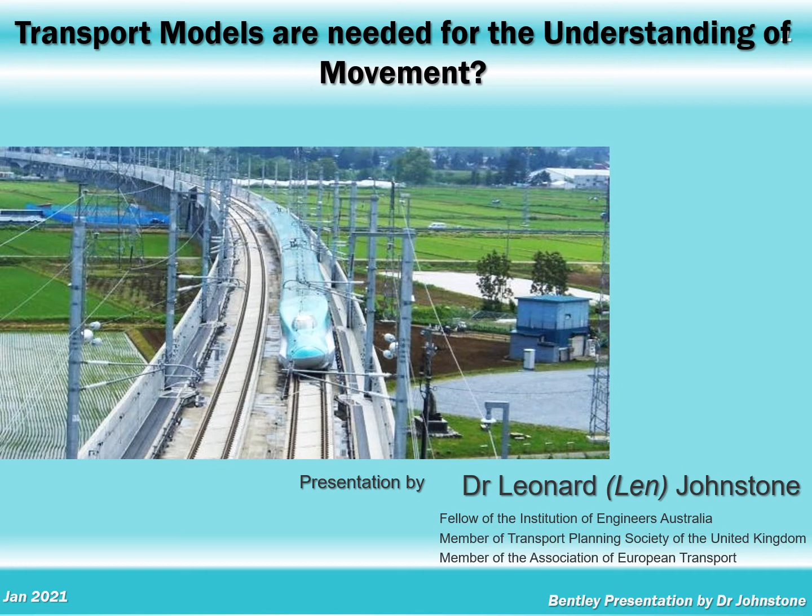Good afternoon. Today's presentation is about the understanding of the movement of people and also the need for the understanding of this in conjunction with the development of a transport model when you're looking at a particular scenario.

Transit development, or the movement of people by any form of public transport, allows a greater mobility for more people and offers decision makers the opportunity to restrict the use of private vehicles. But we think about urban transport, but what of regional or intercity travel? Should we not encourage the same principles in this type of movement?

Today's presentation is divided into 6 sections: an understanding of the movement of people, a modeling overview, a look at the methodology and the forecasting procedure, followed by some examples, and then a recap of what we've done and learned hopefully today. Now, let's look at some things in perspective in the movement of people.

Indian cities in perspective. We will use a transport model for the sizing of the system to look at technology. Today we have to, as transport planners and decision makers, consider compliance with green technology. And can we use a transport model to correctly understand the movement of people between various locations? Let's look at Indian cities in perspective.

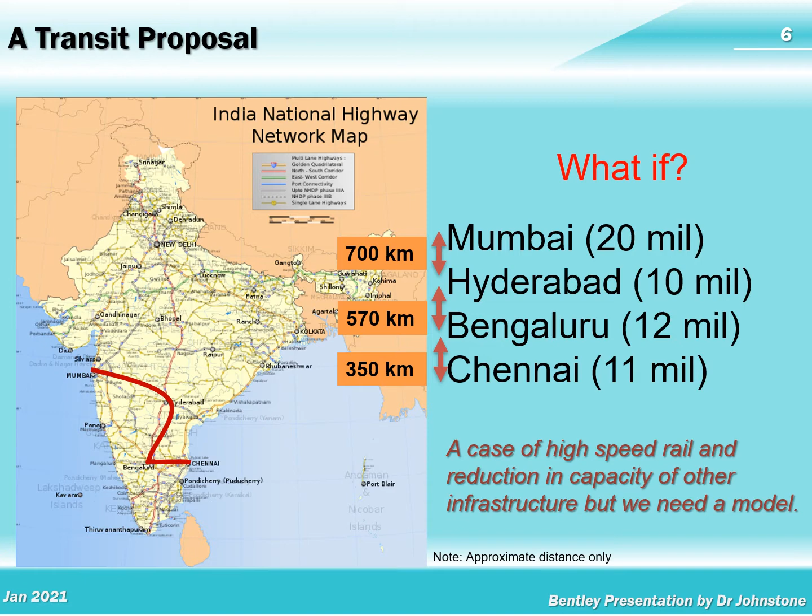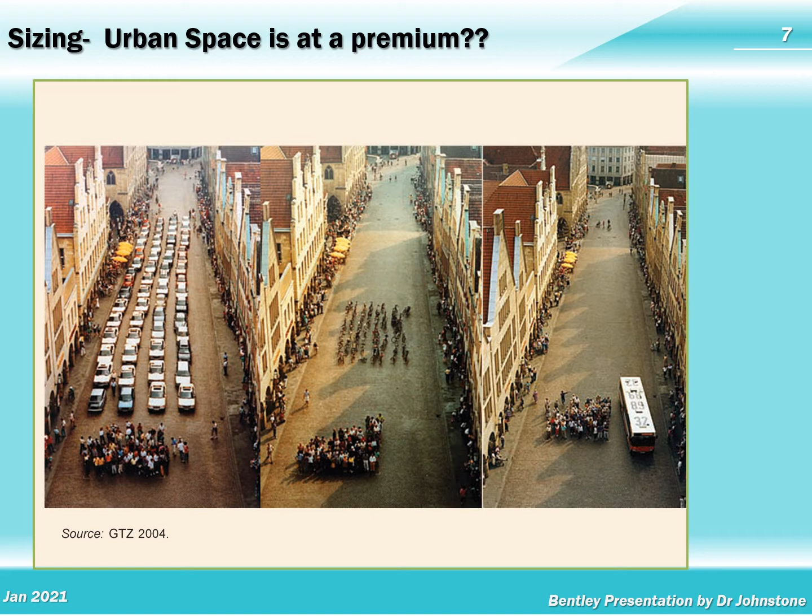We want to size our development. If we have a transit system, we want to size it. Urban space, as you can see, is a premium. If you look on the left-hand side, you see the cars needed to take this number of people, or the number of motorcycles in the center needed to take this number of people. Or finally, we see a bus. One bus can take the same number of people. So we want to look at the system sizing. And this is what can be helped with a public transport model.

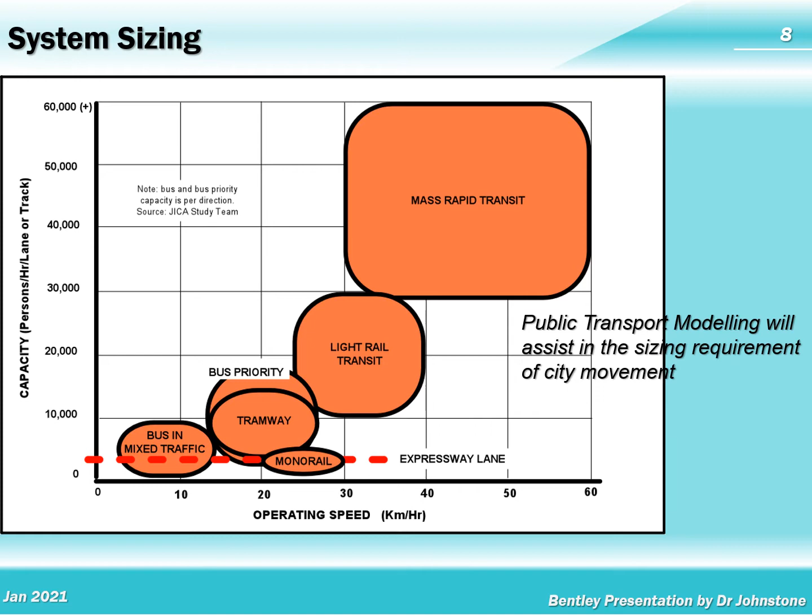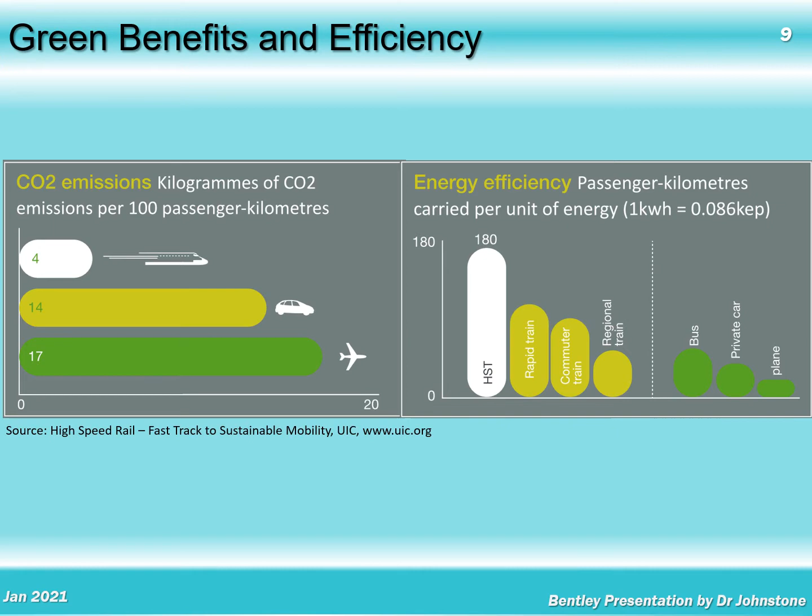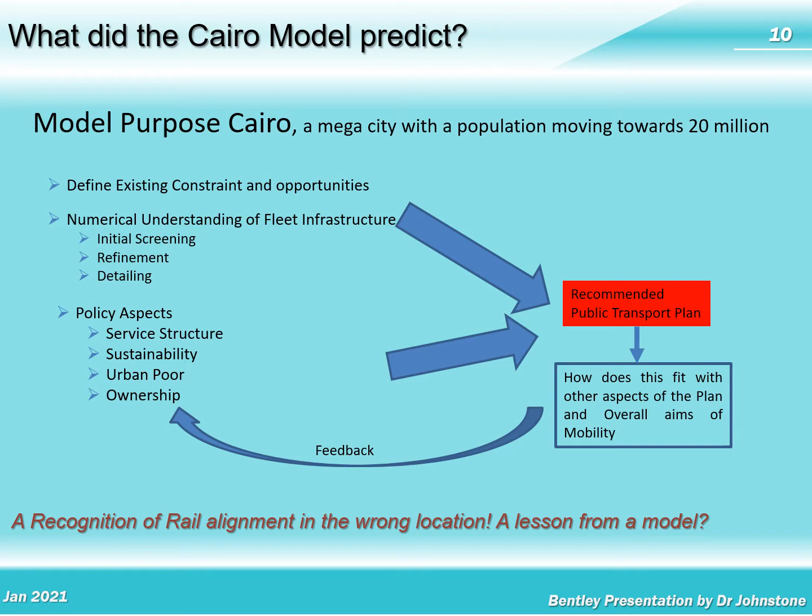In Cairo, a mega city of the world with a population moving towards 20 million people, there is a transport model, and it was used for initial screening. But before there was a transit model or transport model for Cairo, we'd already drawn lines on a map which said this is where the transit line should go. But when we used our transport model and GIS techniques, we saw that this line was in the wrong place. So with mathematical techniques developed within the transport model, we could see that it was appropriate to change the alignment.

So let's step back. Let's look at a modeling overview. Let's try to understand people movement, predictability, transit in a city. We'll have a brief look at Chennai, transit in a region. Where has high-speed rail been developed already? Transit in a city, transit, land development are interlinked. Transit means land cost improvement.

In Bangkok, for example, as the existing elevated transit system was extended, before it was even open, adjacent to every station, once people knew where the station was, there were shopping centers or high-rise accommodation. In other words, the land development in that area was helped. So it pushes up the value of the real estate if you have transit in a city. And we can use a transport model to help us understand that.

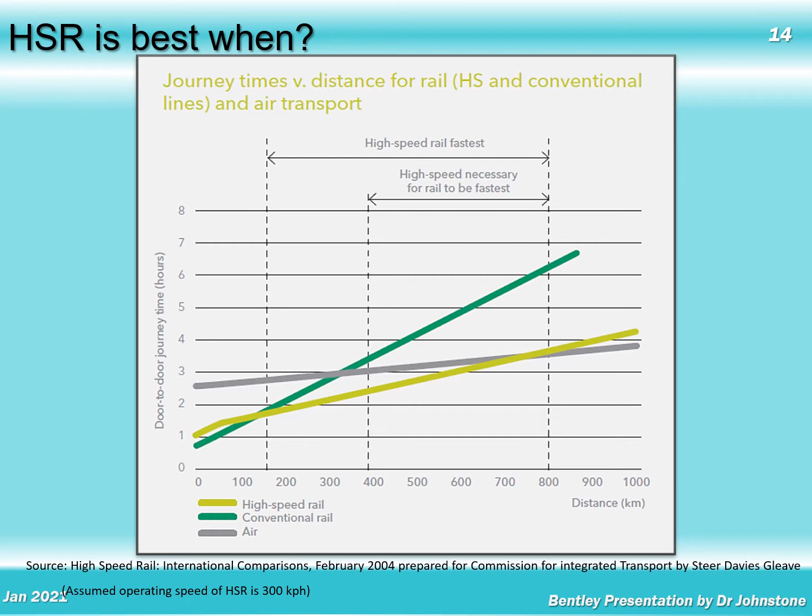And of course, when we think of high-speed rail against air, we can go to the center of a city and get on a train if the station is in the center of the city. But with a plane, we have to go to an airport, which is on the outskirts of a city normally, and then we have to wait maybe 1 or 2 hours for the plane. But with high-speed rail, we can do this almost immediately.

Let's look at the potential impact of a high-speed rail. If we look at some of the original lines in the European situation, for example, Paris to Lyon or Madrid to Seville, about 500 kilometers separation in both cases. Air transport before high-speed rail was 30 to 40%, falling to 7 to 13%. Road was 29 to 44%, falling to 20 to 36%.

If we build high-speed rail, do we still need to put lots of infrastructure in, especially to airports? We see here in this example, especially Paris to Lyon, one of the first routes in Europe, the air travel went from 31% to 7%, a very significant difference.

Where has high-speed rail been developed? We see it in Asia, we see it in Europe. In Asia, it's mainly been Japan, China, and Taiwan to date. And we see the network in Japan, for example, 2,400 kilometers. China, almost 10,000 kilometers. Taiwan, a small island, 350 kilometers. The average operational speed is 300 kilometers per hour.

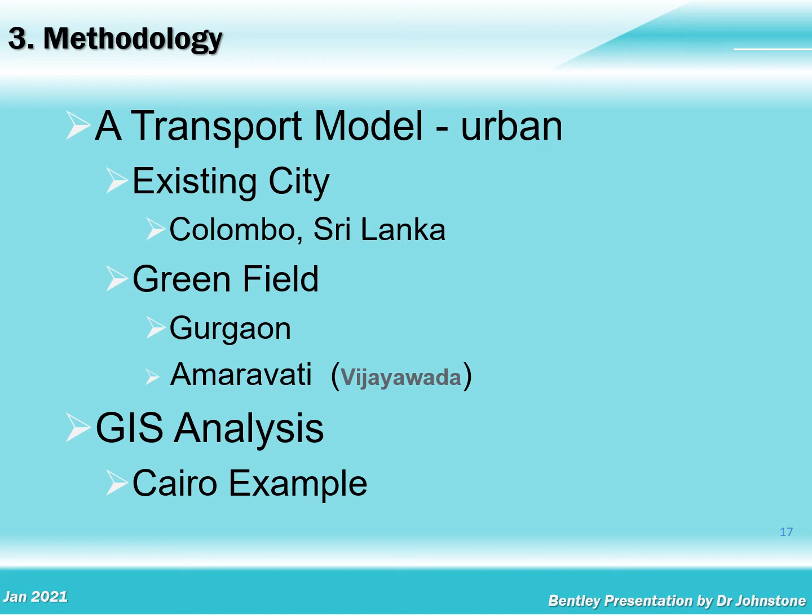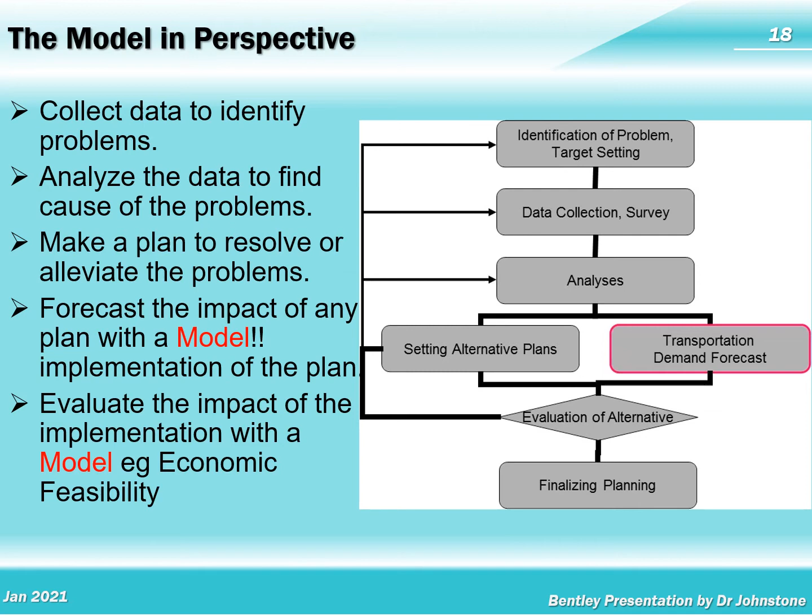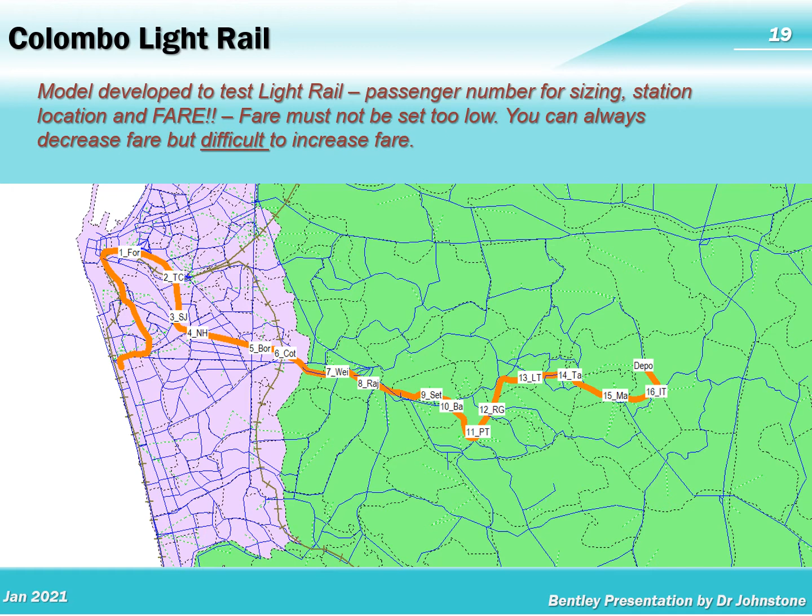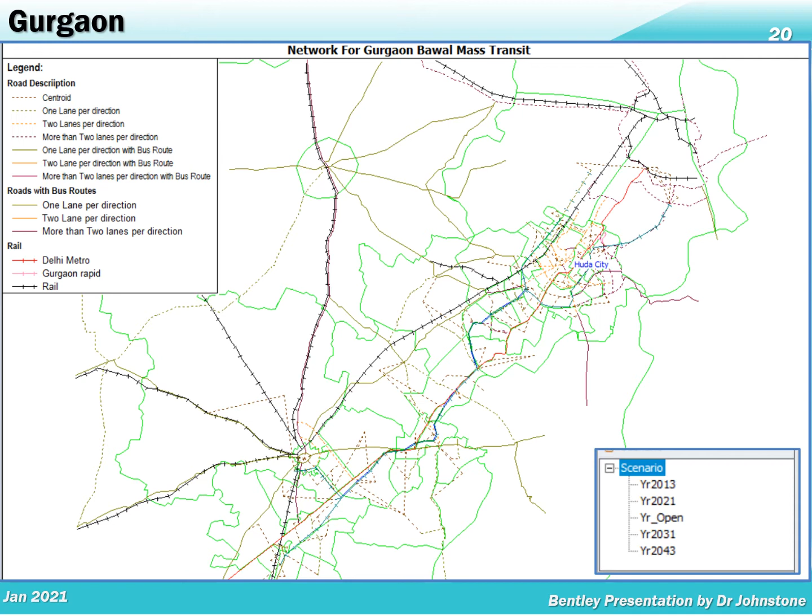Many of you are aware of the wonderful metro system as it exists in Delhi. There was a project to develop a greenfield site south, an extension of the Delhi metro from Huda City to Bawal. This unfortunately did not materialize at this point in time, but the model gave us an idea of how and how many people would be attracted to such a system if it was developed and made to operate.

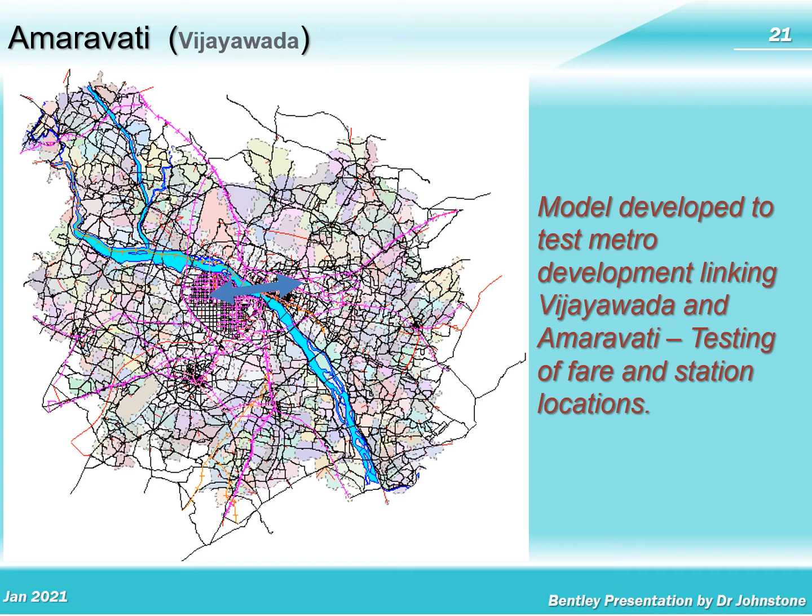In Amaravati, which was a proposed new city adjacent to Vijayawada, the model was used to develop and test a metro. We wanted to connect the existing city of Vijayawada to the proposed new city of Amaravati. We needed to test what type of system we might need. This was very important to understand, again, the sizing of the system. We wanted to use the model that we developed here to also estimate the fare and look at the station locations.

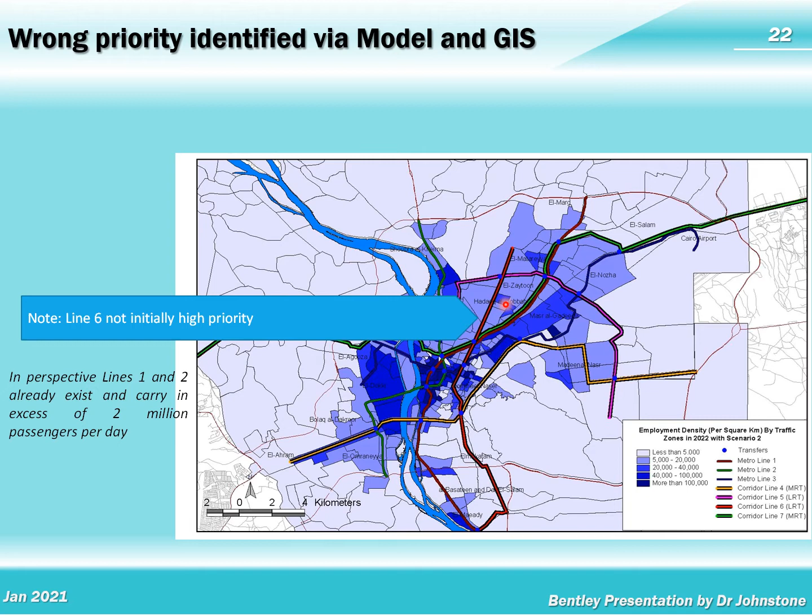And by using a transport model that was developed for Cairo, together with GIS techniques, we saw that it was important that the metro line go next in this direction, adjacent to higher populations and employment centers, rather than in this direction, where the population and employment was not so high. The importance is we always only have limited funds for expenditure. Thus, the model, when developed, can help us and guide us in the right direction.

Now we want to look at forecasting procedure, the model structure, what is needed. We often have to collect data. Many places do not have a transport model, so we need to collect data to develop such a model. Just a couple of techniques and definitions that we might need as we look at the development. This is really with respect to an urban transport model.

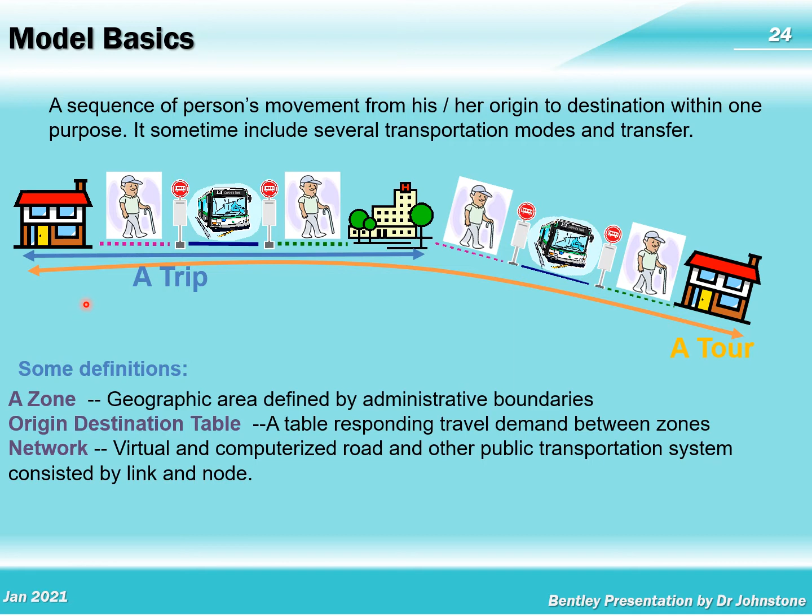The network that we might talk about is virtual and is the computerized road and public transportation system. You might say it is a digital twin of the reality. We look at the reality of a network, which is the road system, the transit system, and how we might travel by transit, or how we might travel by air, which is part of the network for long distance traffic. And then we put this into a digital system, which is a virtual computer road and other public transport system, so that we can understand it.

What do we need in the development of a transport model? If we have a city model, if we have sufficient funds, we would do a home interview survey. These are very expensive. A home interview survey in any major city, there will not be very much change out of $1 million US converted into local currency. We want to do traffic counts. We want to do travel speed surveys. We want to do inventory surveys. And we also need to collect demographic data at a small area or traffic zone basis. So often the demographic data is available from census information.

Now this is a city model. We look at a regional model and we want to do traffic count surveys. We want to do roadside interview surveys. We may want to do sensitivity surveys. If we're looking at not only people, but cargo as well, then we need to do freight surveys. But for this presentation, we're concentrating on the movement of people at the city area and the regional or national area.

So one particular survey that we can look at, which is used both in a city analysis and in a national or regional analysis, is the roadside interview survey, becoming more difficult in cities because we need the cooperation of law enforcement to actually stop vehicles. But with the vehicle stopping, we want to know the origin and destination of a trip, and we want to know that by a traffic zone. So we have to work out a way, when people tell you where they're going from and going to, to then be able to put that into a digital format.

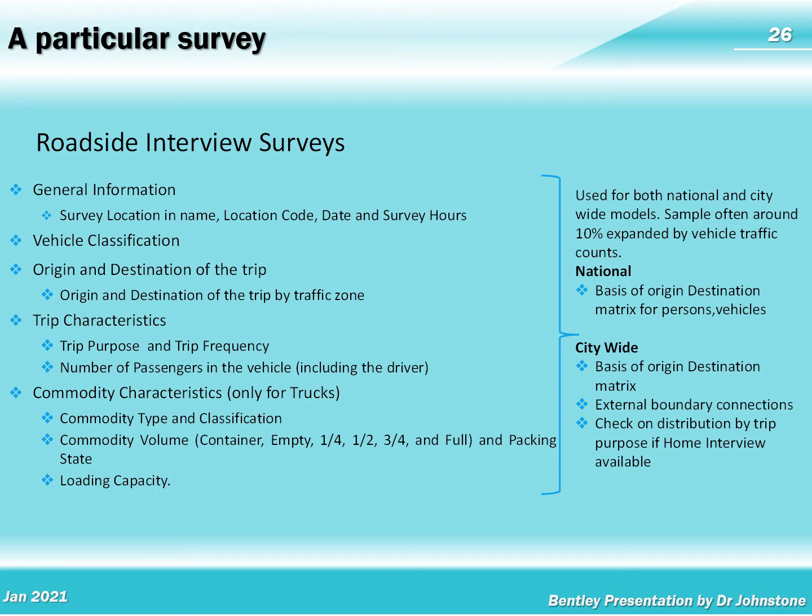In this case, this is an example of a high-speed survey that was done looking at the potential travel between Yangon, the capital of Myanmar, and, you might say, the cultural or tourist center, Mandalay. Myanmar is quite unique in that it has these two major cities, which could be at either end of a railway link. But in the center, to make it even more attractive, we have Naypyidaw, the national administration's capital.

Here, we wanted to understand in the surveys initially how many people would use the system. So we needed to understand the sensitivity of fare. Fare became very important. So we needed to know if people were prepared to move away from the use of, in Myanmar, for most people it's bus, but there's some people who use car. The existing train service or rail service is very slow, so people did not tend to use that between the two cities.

We have different model structures, you might say. For a regional or national model you see on the left-hand side, where we look at total person trips, and we might split into high performance and non-high performance. High performance being air and high-speed rail. So these are the faster trips. Non-high performance being car, and then splitting into public transport. We would often look at this by economic clusters. So we would do the modal split for each economic cluster. In the case of this, which is an example of a high-speed rail model from southern India, we did it in

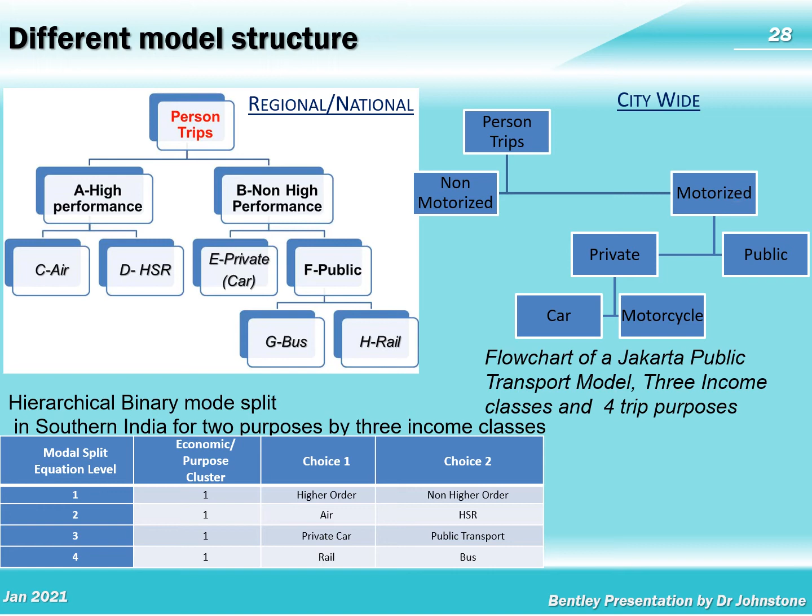When we talk about modal split, it's worthwhile just spending a few minutes to understand that if we can do 2 choices, and so it's a hierarchical model as we just saw, then we can use a logit model. And you might say the calibration of a logit model is very difficult, but if the probability and the cost can be structured correctly, then if we do a series of binary choices, we can actually do a best fit linear regression, which of course linear regression is relatively easy.

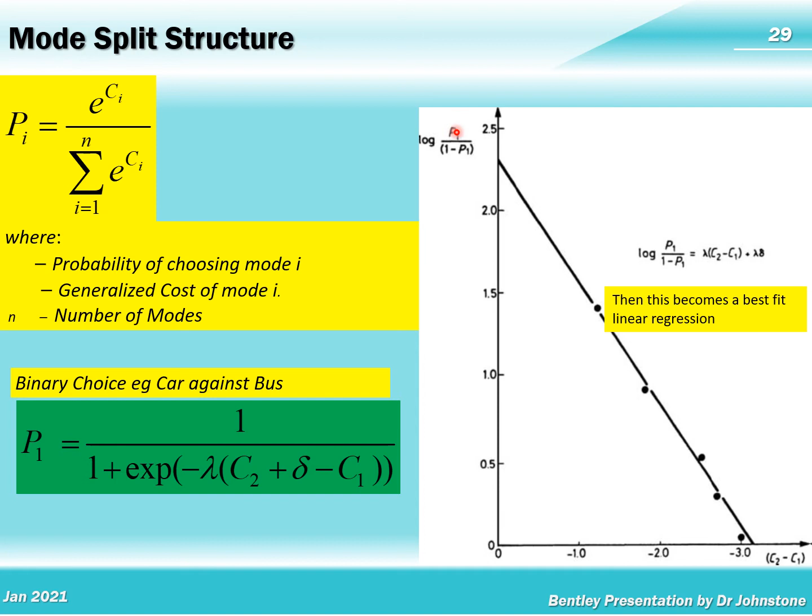The techniques are well known, and it can even be done in a spreadsheet to estimate the parameters of this line. So even though the mathematics might look complex and complicated, we can break it down into some form such as this. Some examples. I want to share with you 2 examples. One, when we developed a transport model for the outskirts of Delhi, and another example when we developed a high-speed rail model in southern India.

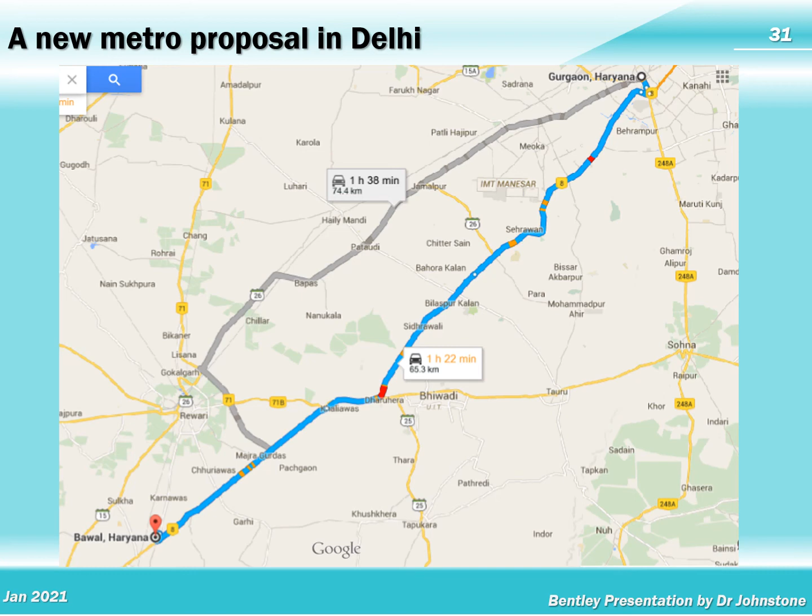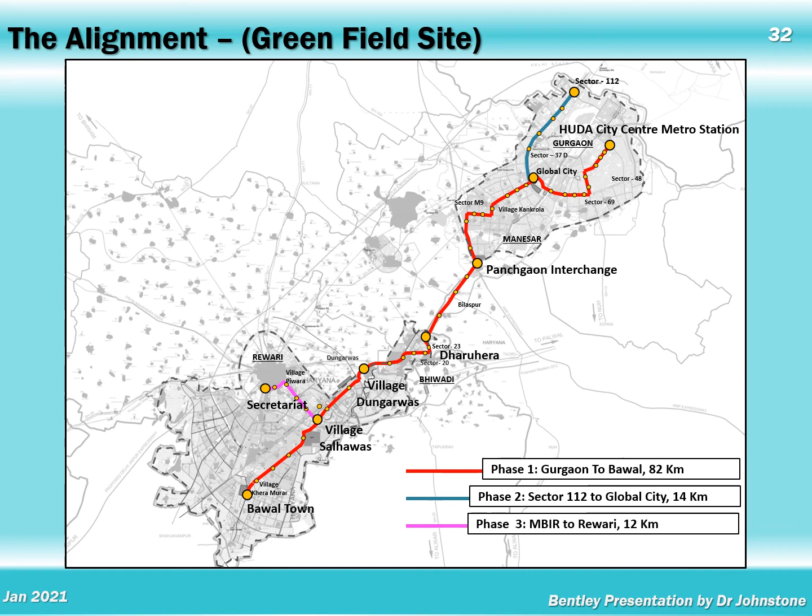So this is Huda city, and this is Bawal. And so we were looking at developing a transit system here. But this was almost a greenfield at the time. This is about five years ago, if I remember correctly. And so it was difficult to understand what might happen when you actually had no people there at that particular point in time. So with a greenfield site, we looked at having to do surveys to understand the movement of people, and then we had to also look at where we might have the major centers for our station locations.

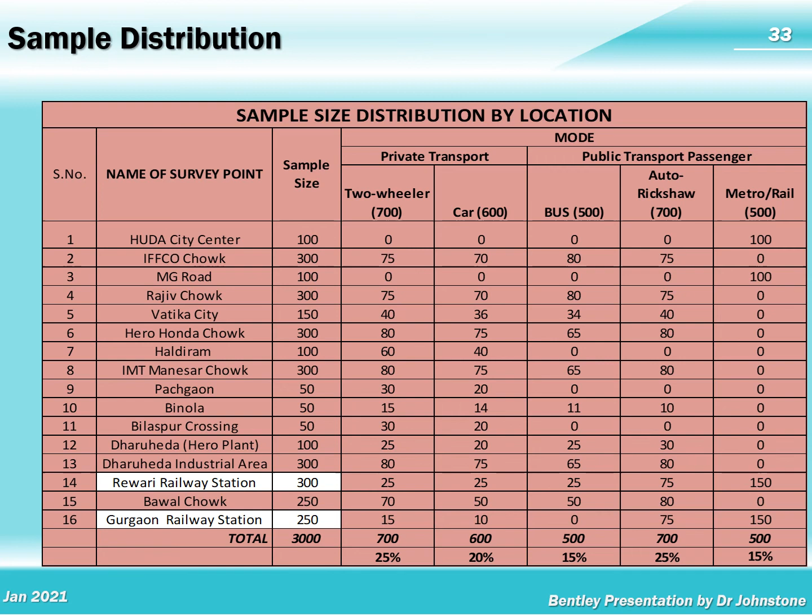So we did a small survey at many points along the potential route, where we interviewed 2-wheeler vehicles, 700 of them, cars, 600 of them, buses, 500, auto rickshaws, and any existing rail transit. So in the survey form, we asked people personal data, their education level, occupation, monthly income, number of household vehicles. That might seem a strange question, but household vehicles also give us an idea of the income of the household. People often don't want to discuss their income, but they're quite proud to tell you how many vehicles are in their household.

The next part was the trip data, how people are traveling at the moment. And then the third part of the survey was whether they were prepared to pay additional amounts of money for better comfort, and whether they were prepared to pay for time saving as well. And this became the structure of the transport model that we used to understand this process. Our projections from this transport model suggested that we would get a reasonable amount of transit here after opening.

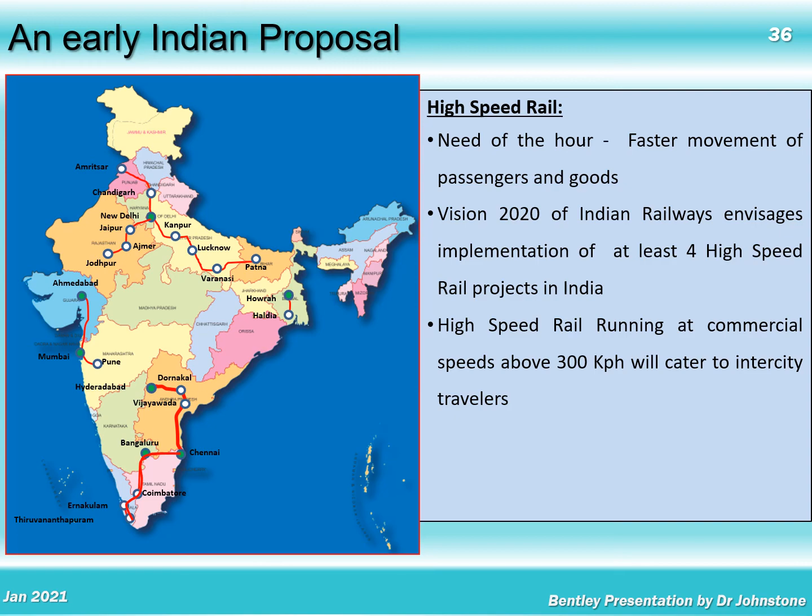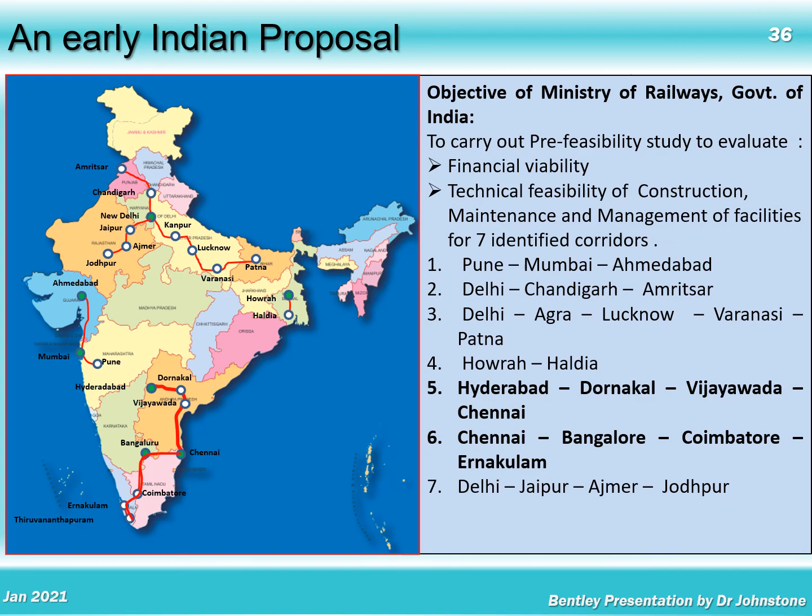The objective of the Ministry of Railways was to look at the 7 identified corridors. Some were split into 2. This is our example that we're looking at. Chennai through Bangalore to Ernakulam to Thiruvananthapuram. So the total distance from Chennai through here is 1,000 kilometers.

But we have large cities here, here, here, and here. So one of the things that was looked at was, if we build high-speed rail in this region of India, what do we need to do as far as the development of other transport infrastructure? Do we still need to make a mega airport at Chennai? Or a mega airport at Bangalore? Can these be considered as alternatives to high-speed rail?

Again, we needed to do surveys here in the development of our mode split equations. So once more, we asked personal information about car ownership, the number of people in the household. Then we asked people about their trip information, how much they pay for a trip, the trip frequency, what mode they currently use. Then we went on to a stated preference sample, whereby we tried to understand, if we charge a certain amount of money, would people use our high-speed railway system?

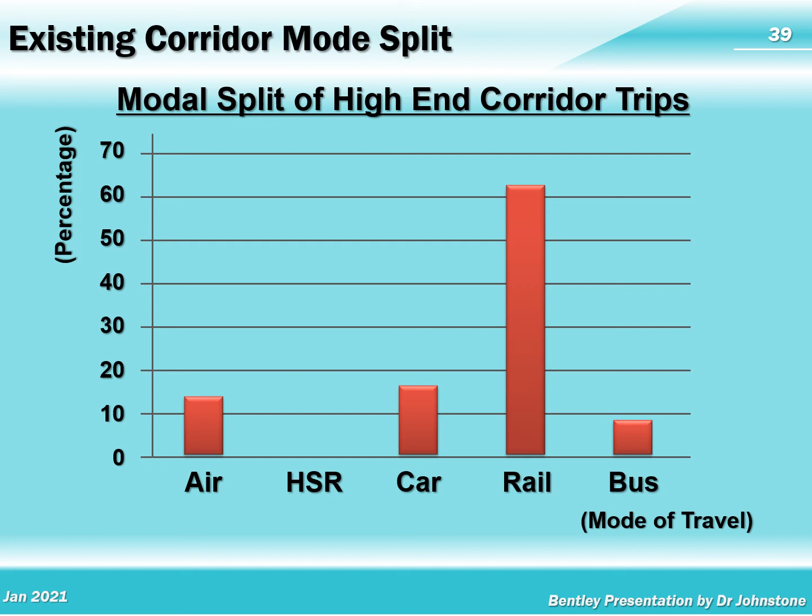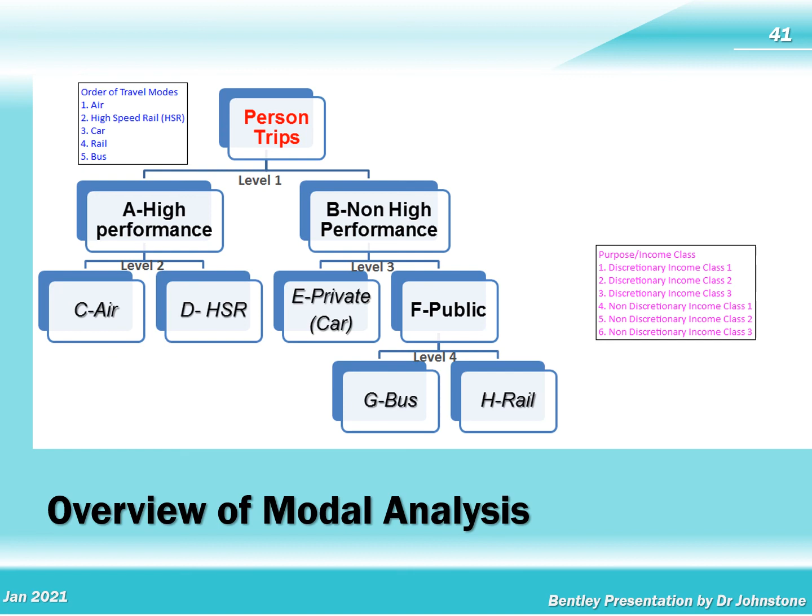And we developed it into 3 income classes. And we used 2 trip purposes, what we call discretionary and non-discretionary. Discretionary meant you didn't really have to travel. It was for personal business or tourism, but the non-discretionary trip was you must travel. In other words, basically related to the work system. The key inputs into the modal split analysis were travel time and cost.

And the travel times that we looked at were, if we travel by rail from Chennai to Hyderabad, for example, it was 13 hours. If we travel by bus, it was 17 hours. But if we travel by high-speed rail, it was almost 3.5 hours. And this compared to nearly 3 hours with air. So high-speed rail was faster for every mode except air, but it was comparable with the amount of time that was spent traveling by air.